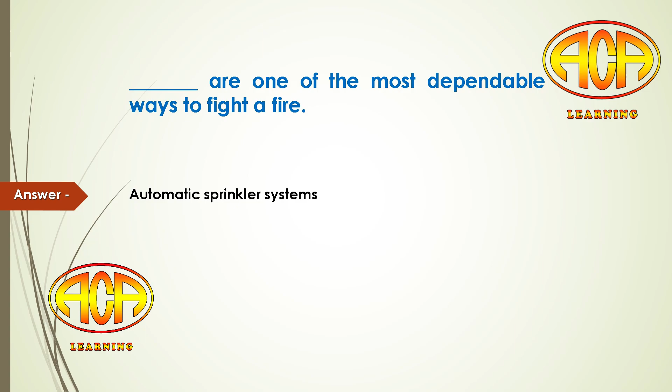A concentration of only blank % will induce rapid unconsciousness. Answer is 10%.

A particular vessel is equipped with the possibility to insert CO2 in the scavenging air belt in case of uncontrolled fire. What are the actions to be taken in case of fire in the scavenging air belt? Answer is reduce the RPM to reduce the scavenge air temperature. When the temperature is reduced and in case the fire is not extinguished by itself, insert carefully CO2.

A self-contained breathing apparatus should contain at least 1200 liters of air. How long should this last a normal person who is not carrying out hard work? Answer is 30 minutes.

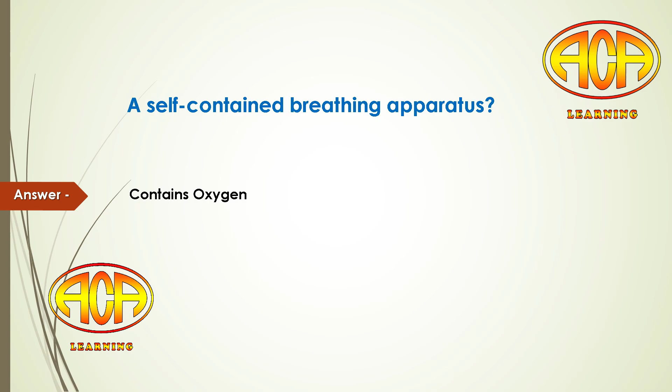A self-contained breathing apparatus? Answer is contains oxygen. A serious fire has been isolated in the engine room. You would? Answer is spray cooling water on bulkheads of the adjacent compartments.

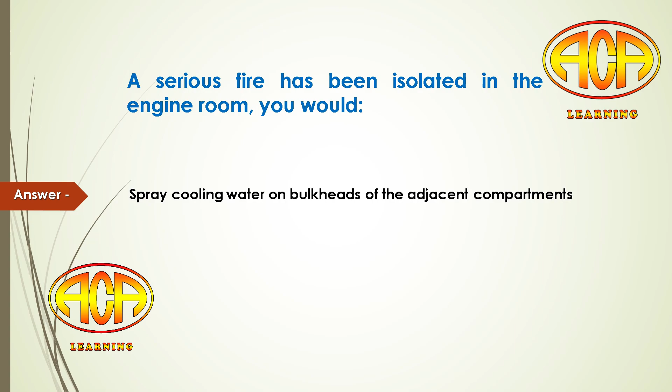A water fire should be on fires started by which of the following materials? Answer is materials such as paper, textiles, wood and other solid materials.

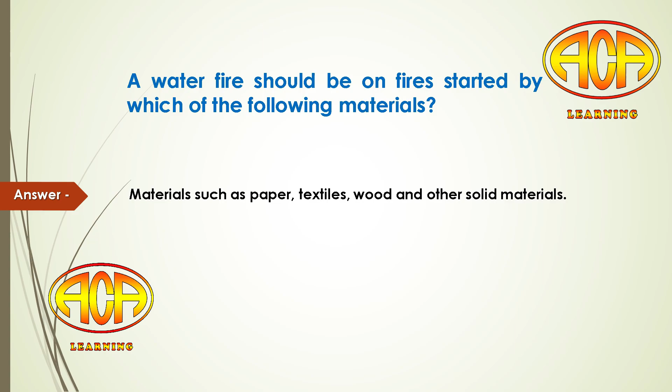Abandon ship drill and fire drill must be held within blank hours of leaving port if more than 25% of the crew have not taken part in drills on board the ship in the previous month. Answer is 24 hours.

After a fire has been extinguished in a closed space, personnel may safely enter the space when? Answer is none of above.

An initial attempt to extinguish a galley grease fire may be made by using? Answer is a mechanical foam system.

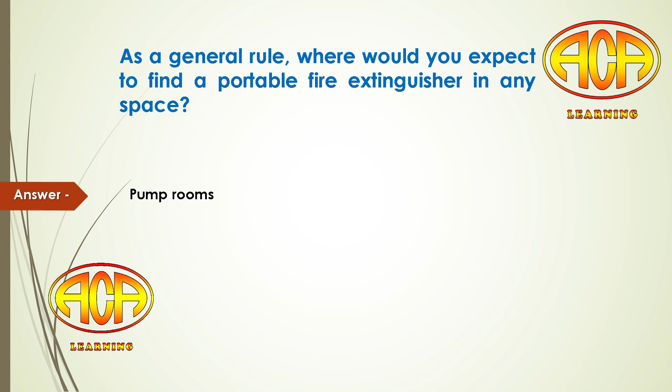As a general rule, where would you expect to find a portable fire extinguisher in any space? Answer is pump rooms. Actual answer not available in the options.

At what percentage of oxygen in the atmosphere is it possible to have a fire? Answer is at 21%.

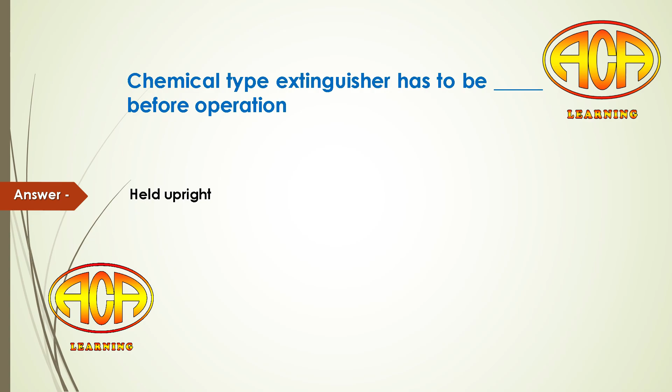Chemical type extinguisher has to be blank before operation? Answer is held upright.

EEBD is used in case of emergency escape and the minimum duration it will last is? Answer is 10 minutes.

Emergency means of lighting is provided when there is a blackout? Answer is both emergency generator and emergency batteries.

Flammability means? Answer is both - that burns below 37.5 degrees and any fuel that can burn.

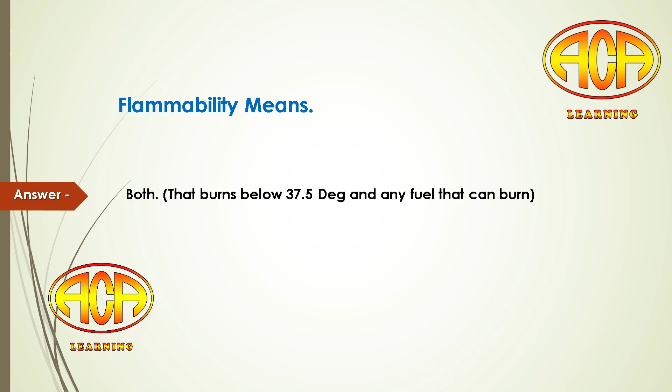Flammable cargoes are those with a flash point blank. Answer is below 37.8 degrees Celsius.

Fuel flowing in a pipe is prone to which of the following ignition sources? Answer is static electricity.

Fully pressurized gas carriers are designed for excess pressure in cargo tank above? Answer is 17 bars.

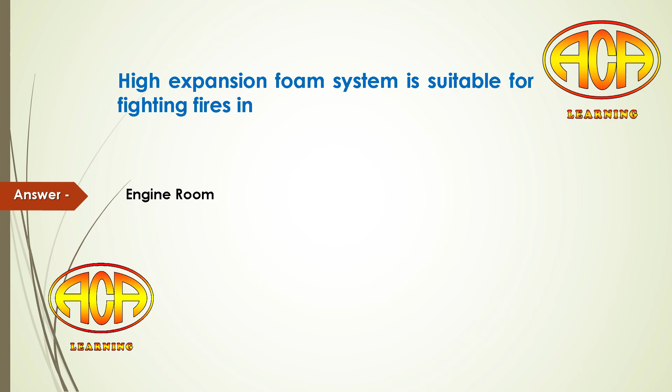High expansion foam system is suitable for fighting fires in? Answer is engine room.

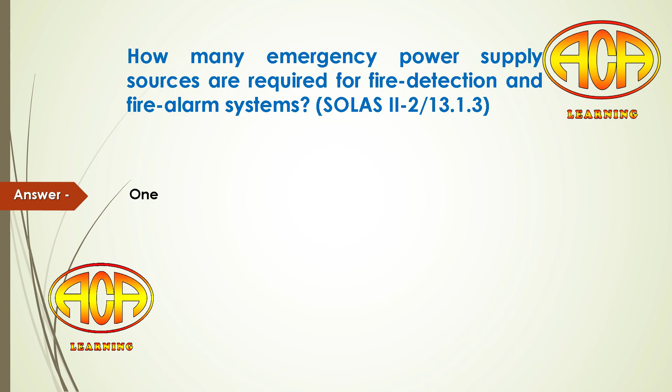How many emergency power supply sources are required for fire detection and fire alarm systems? Answer is 1.

How many firemen's outfits are required to be carried on tankers? Answer is at least 4 sets.

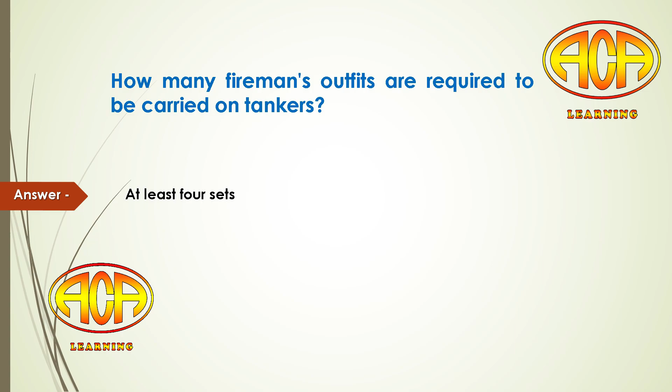How often must fixed CO2 fire extinguishing systems be inspected to confirm the cylinders are within 10% of the stamped full charge weight? Answer is annually.

Ideally, the adjustable jet spray nozzle on a hose should be used as? Answer is a spray of arc 60 degrees.

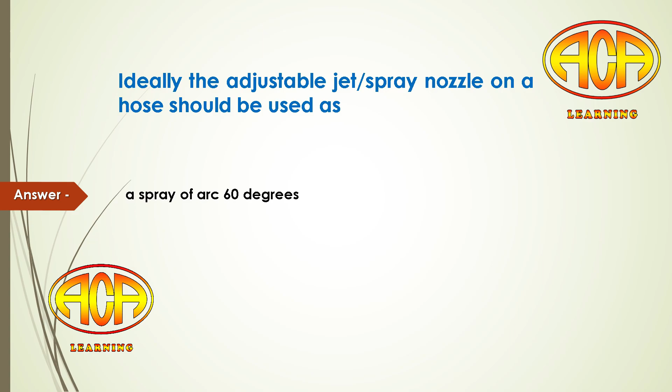If a fire occurs in the boiler room as a result of a leaking fuel line, you should first? Answer is isolate and secure the piping.

In case of fire on electrical motor, first thing to do is? Answer is sound alarm, stop motor and extinguish using CO2.

In order to produce a high-velocity water fog using an all-purpose nozzle, you must? Answer is change to a small nozzle tip after changing the position of the nozzle handle.

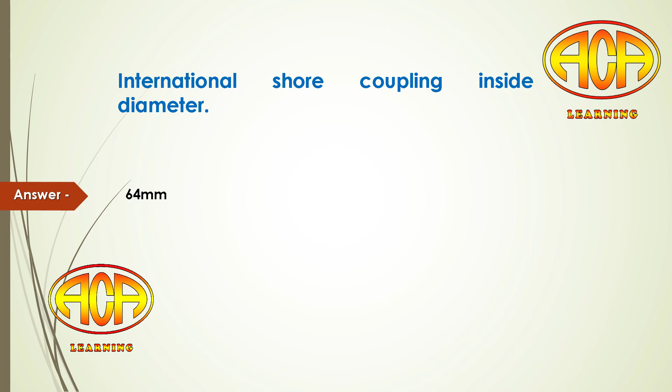International shore coupling inside diameter? Answer is 64 mm.

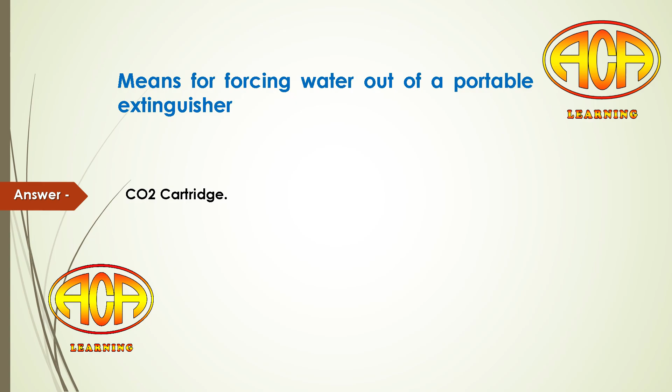Means for forcing water out of a portable extinguisher? Answer is carbon dioxide cartridge.

Minimum capacity of emergency fire pump to be blank. Answer is 25 cu.mtr.

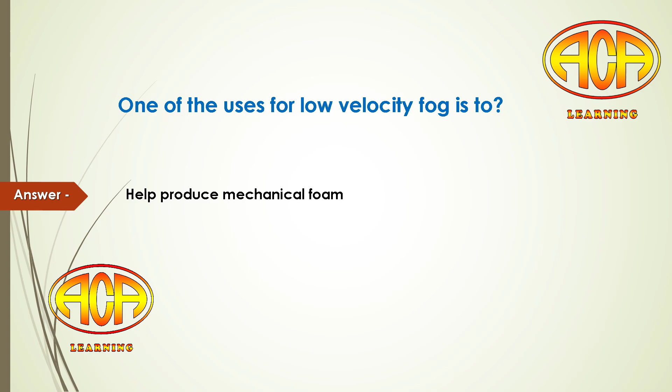One of the uses for low velocity fog is to? Answer is help produce mechanical foam.

Quick closing valve is fitted on? Answer is fuel tanks above double bottom tanks.

Self-contained breathing apparatus SCBA is also called as? Answer is compressed air breathing apparatus CABA.

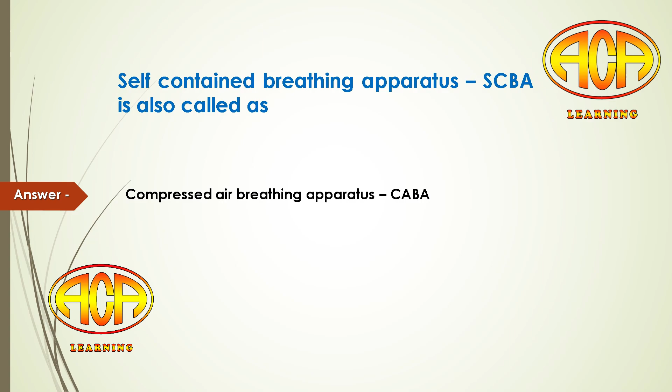Some cargoes, such as certain types of coal, can heat themselves up to a temperature where they can automatically ignite. What is this process called? Answer is spontaneous combustion.

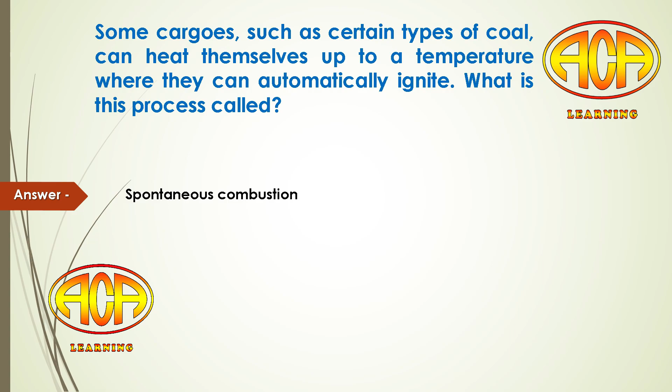Temperature at which the vapor concentration near the surface of the liquid is high enough to start a fire with a flame. Answer is flash point.

The area you must assemble in the event of the fire is called? Answer is the muster point.

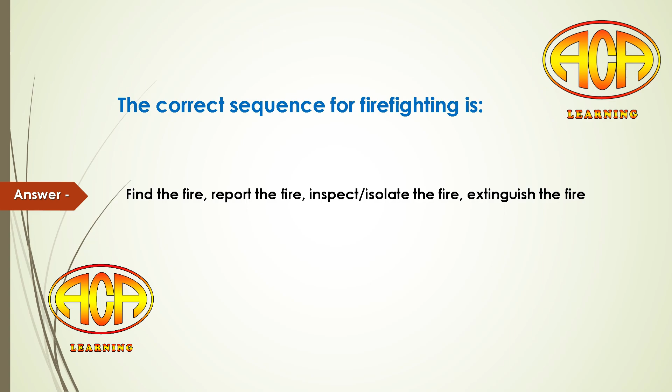The correct sequence for firefighting is? Answer is find the fire, report the fire, inspect, isolate the fire, extinguish the fire.

The fire protection provided for the propulsion motor and generator of a diesel-electric drive vessel is usually a? Answer is a fixed CO2 extinguisher.

The firefighting water sprinklers cover a distance of? Answer is 16 square meters.

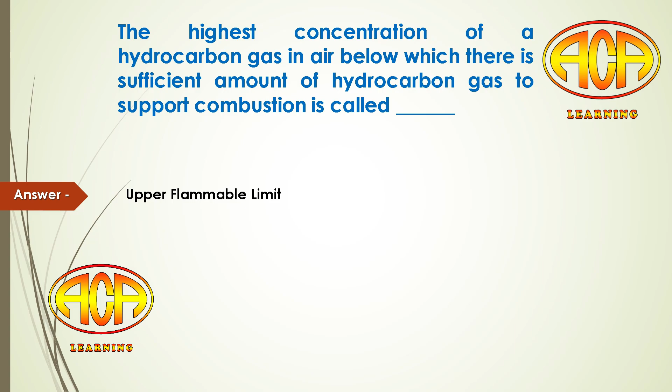The highest concentration of a hydrocarbon gas in air below which there is sufficient amount of hydrocarbon gas to support combustion is called blank. Answer is upper flammable limit.

The portable extinguisher designed for use on almost all classes of fire is a? Answer is dry chemical extinguisher.

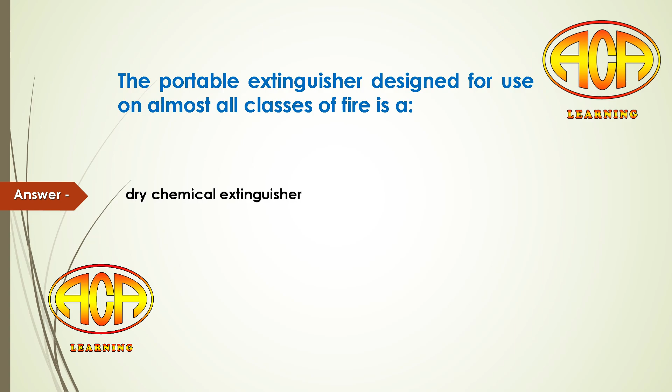The portable fire extinguisher is designed to put out blank effectively? Answer is small fire.

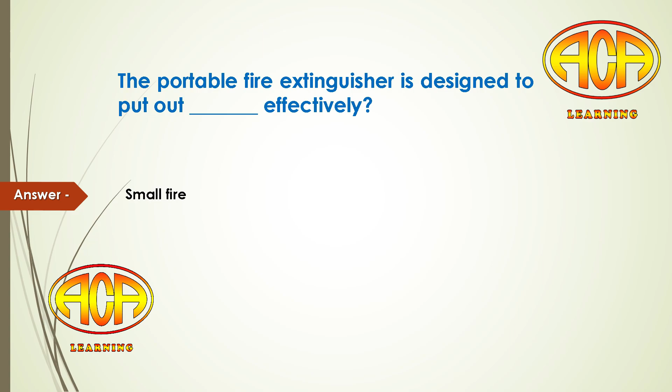The powder in a dry chemical fire extinguisher blank. Answer is may cake up and fail to discharge properly if not occasionally agitated.

The weight of portable fire extinguisher is not more than? Answer is 23 kgs.

There shall be at least one blank capacity or equivalent water fire extinguisher in each boiler room. Answer is none of above.

What are the criteria that require automatic fire detection on board a ship with heat, smoke detectors and audio alarm? Answer is all ships that are covered by the IMO safety conventions.

What does AFFF stand for in relation to firefighting? Answer is aqueous film forming foam.

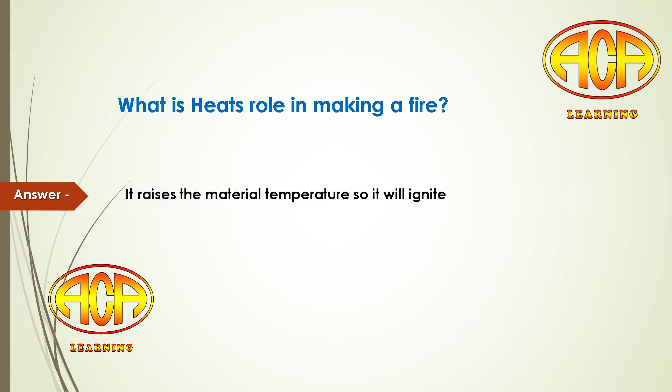What is heat's role in making a fire? Answer is it raises the material temperature so it will ignite.

What is meant by the term self-ignition temperature, SIT? Answer is the lowest temperature where the vapors given off will automatically ignite without the presence of an external ignition source.

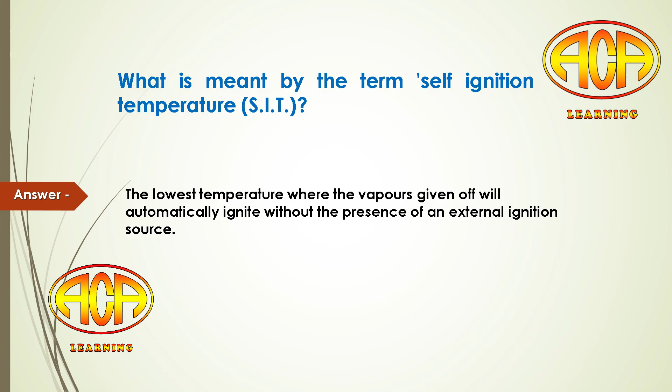What is the minimal information to be available at the central control station, bridge? Answer is fire detection panel.

What is the number one job for the ship management team when fire breaks out? Answer is the ship management team must fight the fire and then call the fire squads.

What other purposes may a fixed fire detection and alarm system be used for, in addition to fire indication? Answer is controlled closing of fire doors.

What type of release is allowed for fixed gas fire extinguishing installations on board? Answer is a manually operated release only.

When is it required for portable carbon dioxide fire extinguishers to be recharged? Answer is whenever used for demo or to fight fire on board ship.

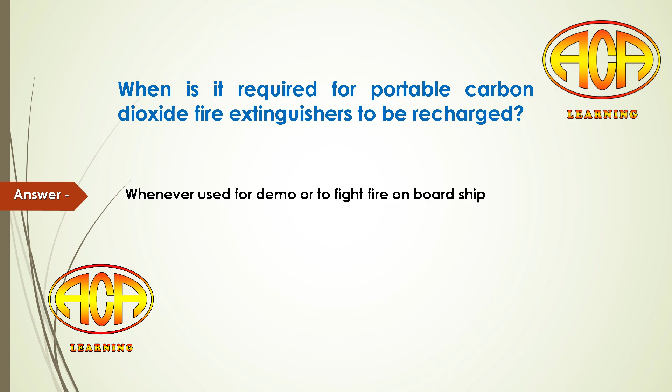When using a portable foam extinguisher on an oil pool fire, the stream is directed? Answer is against a vertical section of the fire pool.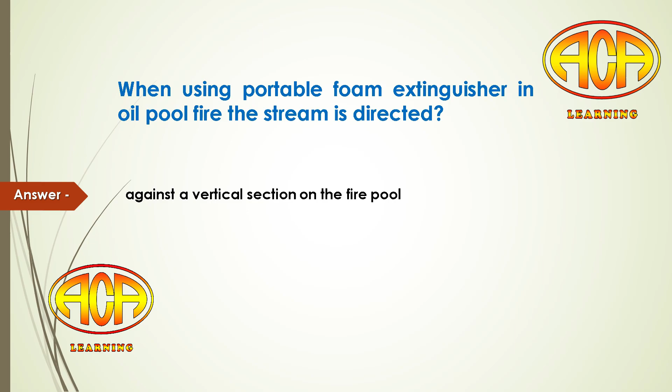Why should a CO2 extinguisher be used with caution in confined areas? Answer is it will displace the air and reduce the amount of oxygen available.

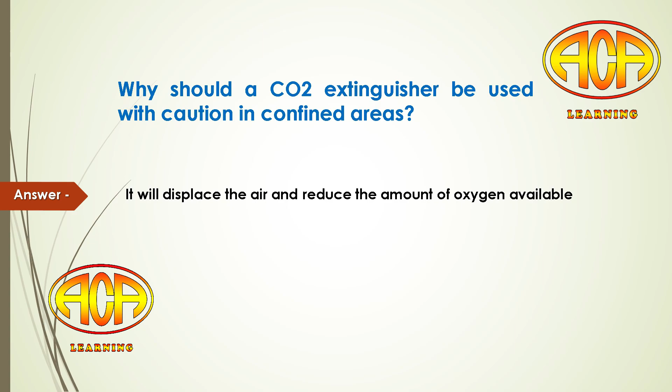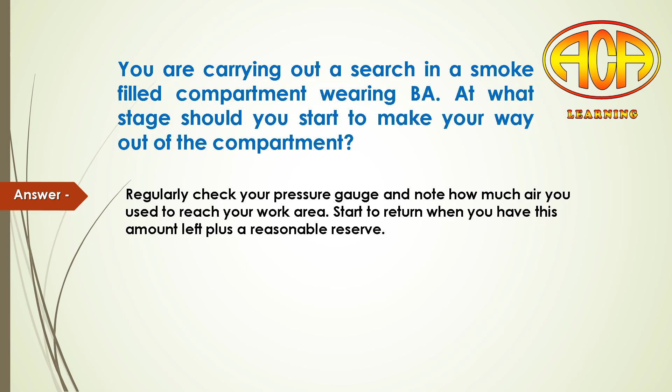You are carrying out a search in a smoke-filled compartment wearing BA. At what stage should you start to make your way out of the compartment? Answer is regularly check your pressure gauge and note how much air you used to reach your work area. Start to return when you have this amount left plus a reasonable reserve.

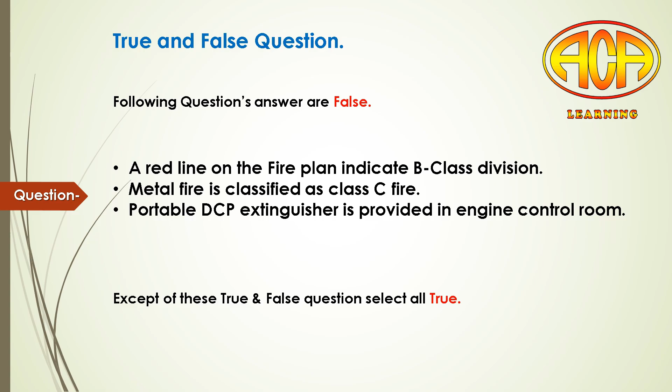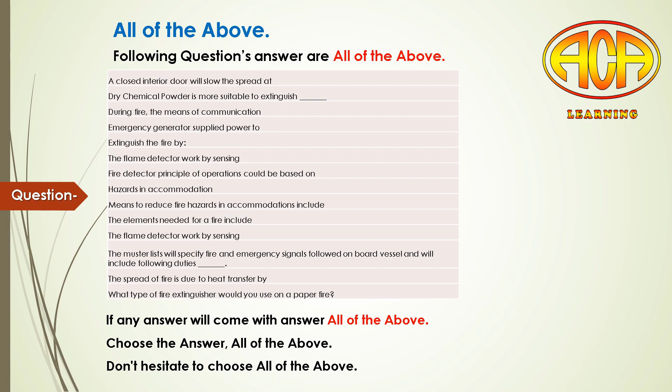The following questions' answers are false, except for these true and false questions - select all true. If any answer comes as all of the above, choose all of the above. Don't hesitate to choose all of the above.